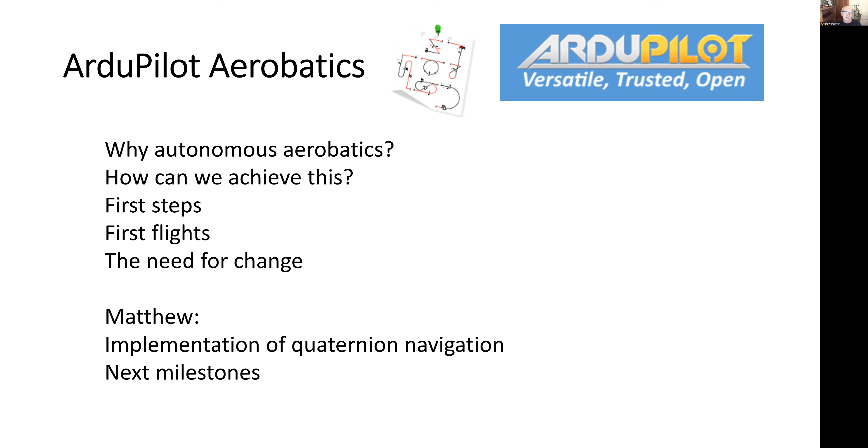So, autonomous aerobatics. In the full-size world, in 1913, a military pilot named Nesterov was the first in the world to perform a closed curve in a vertical plane - basically, he did a loop. With this maneuver, Nesterov really laid the foundation for modern aerobatics.

Of course, aerobatics in the model world means different things to different folks. There's precision aerobatics, which is a bit like figure skating; IMAC, which is a bit more like slalom skiing; and freestyle or 3D aerobatics, which is like snowboarding. To some pilots though, aerobatics is simply doing the occasional loop or roll.

Adding aerobatic possibilities to ArduPilot gives pilots using ArduPilot something really cool to show their mates, but there are also potential uses in collision avoidance, upset recovery, and other more serious applications.

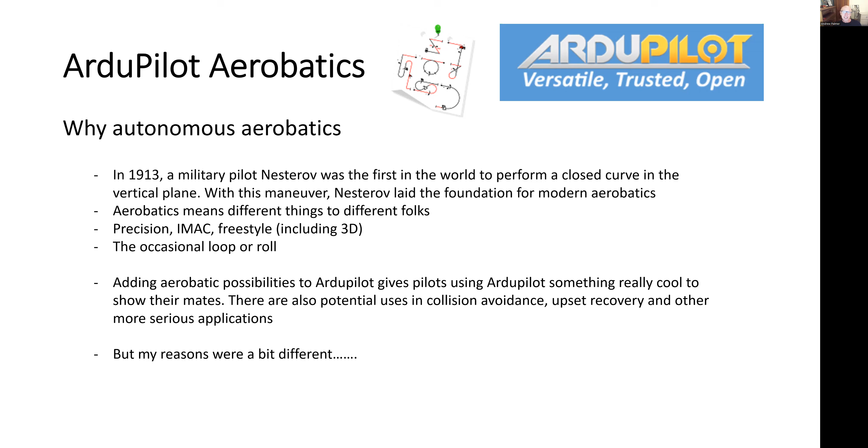But my interest in this was something a little bit different. A little background: I've been flying model aircraft aerobatics, and in fact full size, for a long time. I did some recent work as a rescue pilot for a company using an autonomous autopilot system, and that was really my first introduction to autonomous systems for model aircraft. I thought it would be quite fun to give ArduPilot a try myself.

Concurrently, a group I was involved with were developing a system for displaying competition aerobatic flights as a ribbon or trace on a computer screen, with eventual thoughts towards autonomous judging. I thought it would be really cool to have a model fly the competition maneuvers autonomously, so we could see what the perfect schedule should look like in real life - it's all very well seeing a model fly a ribbon on a computer screen, but you need to know what it should look like in real life. That was really my trigger point for the interest in autonomous flight.

This would be great not only for pilot training but also for judge training. I thought a good starting point would be: could I get a model to fly the outline of the aerobatic box? For precision aerobatics, the schedule's flown in a defined area of 3D space called the aerobatic box or aerobatic zone.

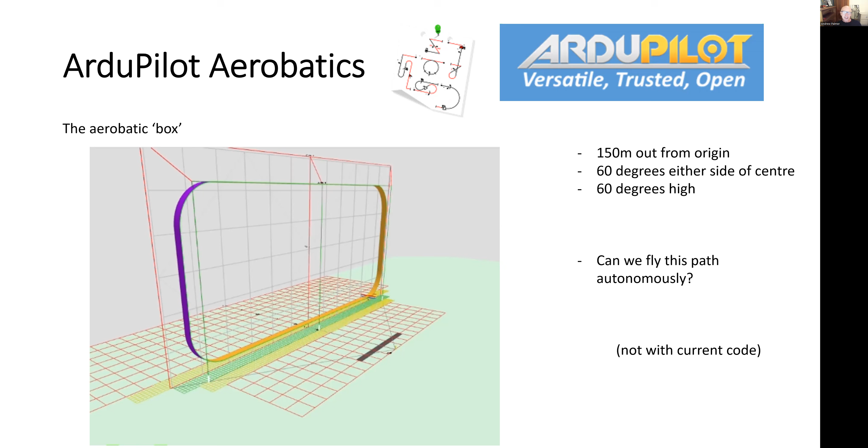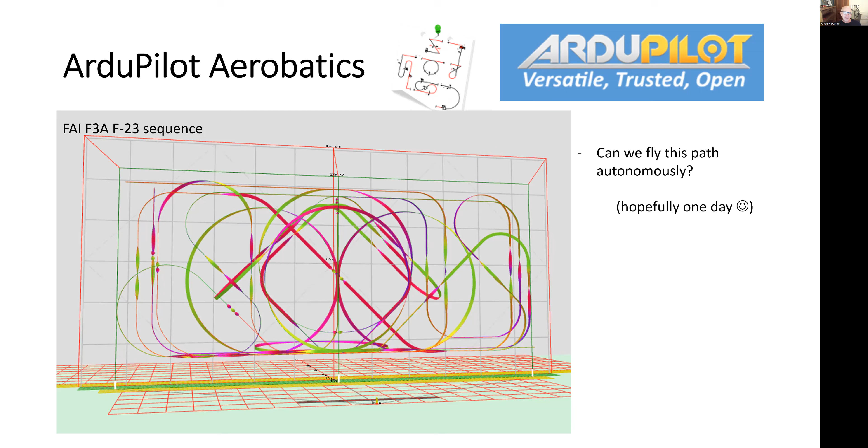So how was I going to achieve this? It was clear just from my early reading that ArduPilot in its current form would not really get me upside down. Now, my mother took my brother and I to night school classes in BASIC in the early 80s, but that's about it. I'm not a coder. I bumbled my way through an iOS and Android app, but nothing more. So really I was a bit lost and not quite sure where to go.

But in my Google searching, I stumbled across the ArduPilot commercial support page, and I saw Andrew Tridgell as a lead developer and thought, well, an email to him would be worthwhile, nothing lost. So a week or two went by and really I'd about given up all hope, but then a reply arrived. Andrew said, sounds like a great project. So it put a smile on my face and we were underway.

So I met up with Tridge on Discord and he very kindly spent a lot of time talking me through the ArduPilot code base, how things worked, and thought that using a Lua script to implement a mission item or a script item during a mission and returning back to the mission would be a good place to start.

So Tridge added a new mission script item, made the required changes to the C++ code, and very quickly we had a scripted loop where we could set the roll rate to 0, define a pitch rate, define a throttle percentage, and away we went. And we could do a roll in a similar manner. But early on, we discovered that we'd need a yaw rate controller, so that was also added to the C++ code. And now we could start writing some different maneuvers in Lua.

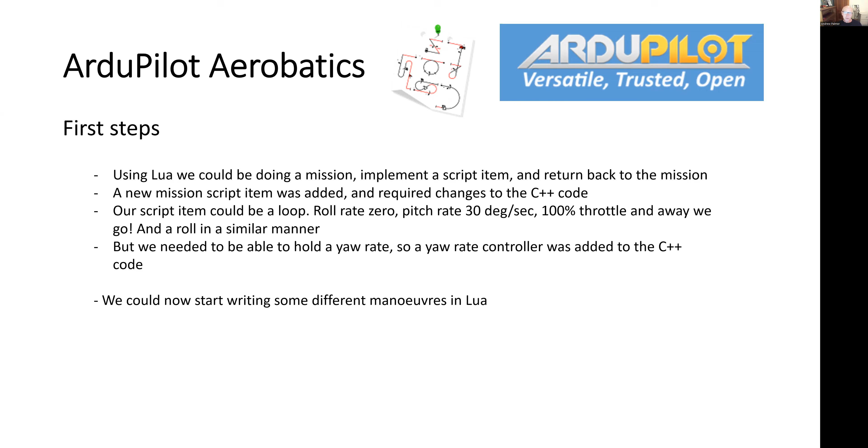So this was really exciting. For me to think that it was getting tantalizingly close at this point, and really it was. So we needed a way to pick a maneuver.

So within the code, we could add a scripted item, have a command for which maneuver we were going to perform, and we could pass some arguments along with that maneuver. Things like for a roll, you might want to pass the roll rate and how much throttle you want to use, or the roll rate and maybe how many rolls you wanted to do. So we started off down those lines.

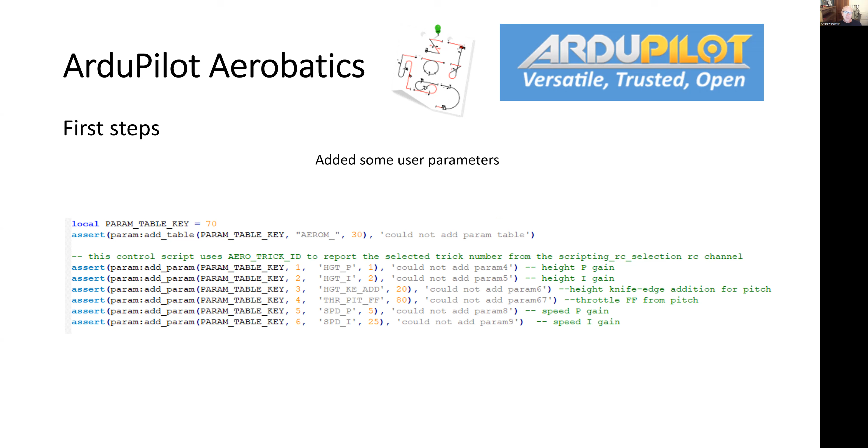We also discovered that we'd need some user parameters, and these were added over time, which gave a little bit more flexibility to performing these maneuvers. And of course, we needed to define the maneuver itself within the Lua script, and so that happened as well. This is just some sample code for performing an axial roll.

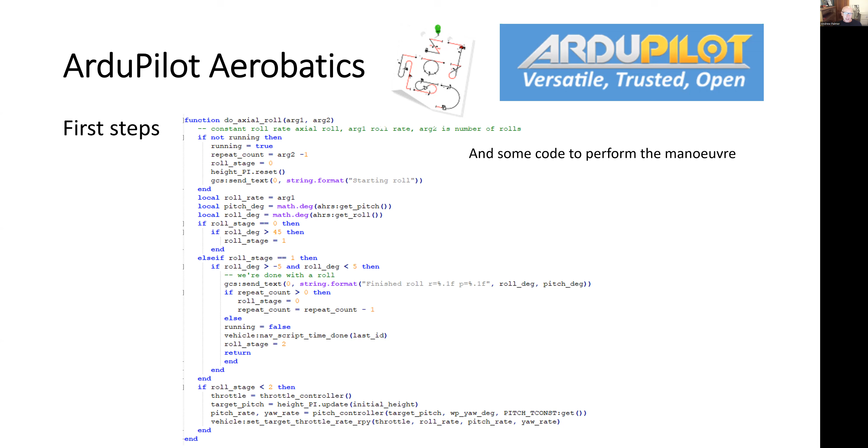Now, those were our sort of starting steps, baby steps really, and scripted aerobatics was born. Now, Henry Wurzburg has made some really exciting changes to that initial code. Not only has he done the documentation on the wiki page, but he's added tricks on a switch, which is just really, really cool, where you can define a switch on your radio transmitter and basically be flying along, flick a switch and do a roll or do a loop or whatever you define. And that's just a really cool development of this original idea.

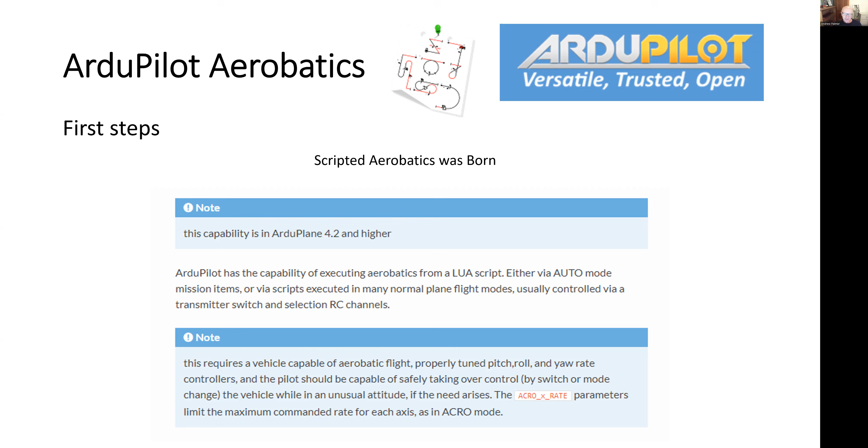And just to show how simple things are, this is an example. I'm sure you're all familiar with Mission Planner and planning a mission. So between a couple of waypoints, we can add a script time item or command. We can tell a command ID, which our Lua script interprets as whether it's going to be a loop or a roll or some other maneuver you've defined. We can pass a timeout, which is important if things go wrong - we want the mission to continue at some point rather than the script try to do something that it can't. And as I mentioned earlier, we can pass some arguments as well, things like roll rate or perhaps number of rolls. So that was all really exciting stuff.

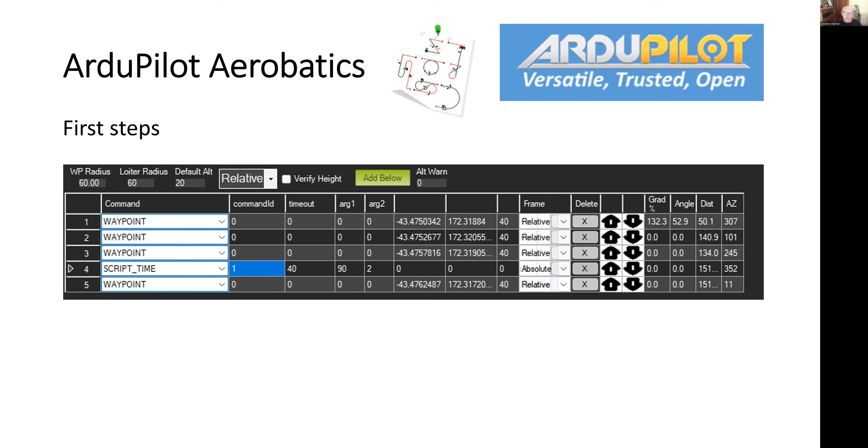One of the really powerful things with ArduPilot is testing missions using SITL, and we can do that with aerobatics as well. So this was an early flight on SITL, using RealFlight to display the aircraft's flight path. This is just a couple of minutes, I'll let this play. As I say, this is very early days—there's no navigation during the maneuvers, and that's something Matthew will talk about. So this is just a mission with some aerobatic script items between waypoints.

Once the Lua script's written, adding these aerobatic maneuvers between waypoints is really simple and easy. Anyone can do it, you need no programming skill at all. So this first maneuver was a Cuban 8—a 5/8 loop with a half roll on the way down, then a 3/4 loop, another half roll, and then exit.

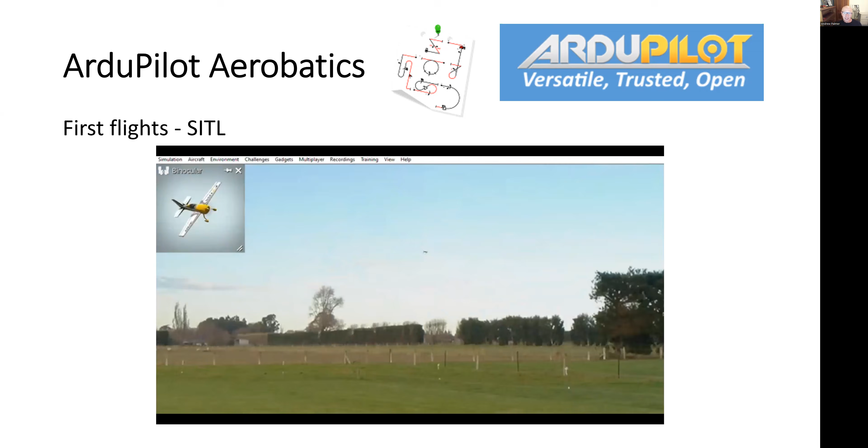You can see the big jerk there at the end of that maneuver. That's the aircraft heading to the next mission waypoint, because again, here there's no path tracking during the actual maneuver. So this is a half Cuban 8 to come back, a maneuver familiar to anyone flying any basic aerobatics. And here we go with a slow roll. It looks like there was maybe a bit of building avoidance there, but really it was just the roll ending and the aircraft heading to the next mission waypoint.

And that was just a loop. Right, so that was just really exciting stuff. And of course, after SITL, well, you've got to go and try it for real.

Now, as I mentioned, I've really had very little experience with ArduPilot, so I thought a good model to start with would be a foamy—something cheap, simple, something I can fly at home and do some flights on. So the model I picked is probably not ideal, but anyway, it's an indoor EPP model. It's 36-inch span, got 3D control throws, cheap small servos. It's pretty unstable, and the trim's always different and all over the place.

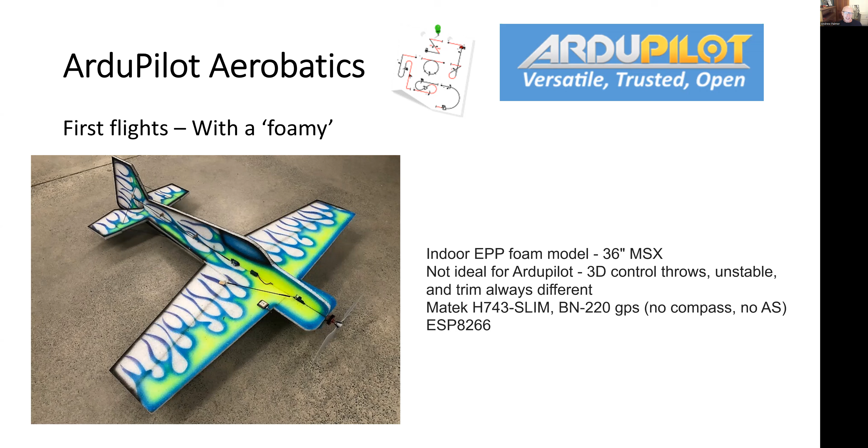But nevertheless, I put a Matek H743 into it, a BN220 GPS, which doesn't have a compass. I didn't put an airspeed sensor on the model. I did, though, put an ESP8266 to give some easy accessible telemetry so I could change things while I was flying and see what was going on. I found the 8266 worked well in this model because it's foamy, there's no RF blocking bits, and with this plane it was remarkable the range I got out of that back to my laptop. It's quite surprising.

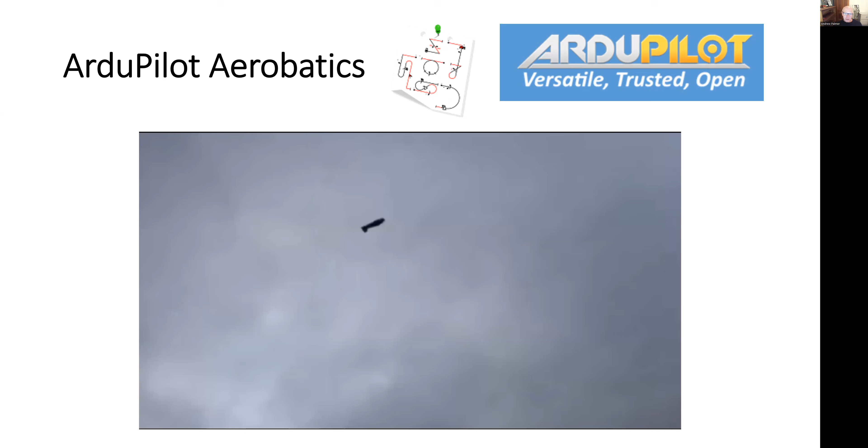Anyway, so with this model I went out and tried a roll. This is really one of the first rolls. I was reasonably high because I didn't really know what was going to happen. But through the mission, it came to the roll waypoint and did a roll, and I thought, wow, that was really cool. And a couple of weeks later, the roll became a rolling circle.

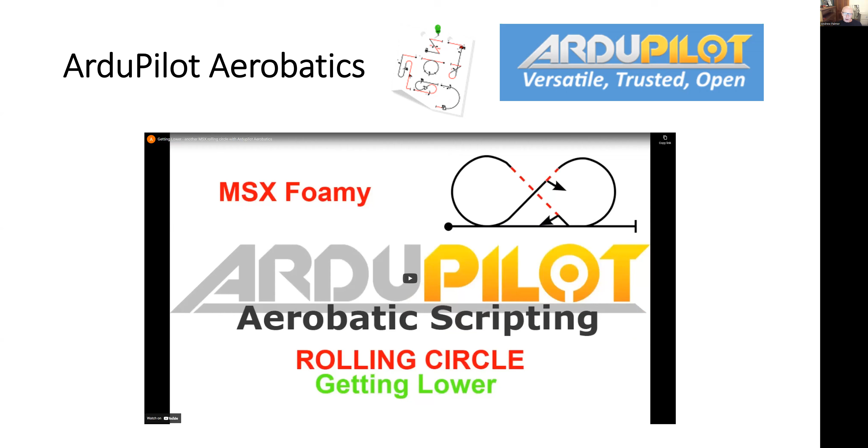It was so cool to see that the first time. It's just amazing to see a real rolling circle on an aircraft actually working. Look, it blew me away. In fact, my wife was videoing it, and she couldn't quite believe it—that it just went along and did the whole thing itself, including the recovery at the end. Of course, that was early days, so rather than one roll for the whole circle, it was one and a bit rolls. But once it got back to the starting point, it sorted itself out, got upright, and headed off to the next mission waypoint. So, very cool stuff.

But we always knew this wasn't going to be the final solution. It was a really good start and really generated a lot of interest, but there was no navigation during maneuvers. One of the big things about any sort of aerobatics is things must be wind corrected, and of course there's no wind correction going on. It was a bit like a blind pilot receiving aerobatic instruction over a radio link with lots of static—it was probably going to get there and maybe the loop was going to happen, but we didn't quite know where it was going to finish.

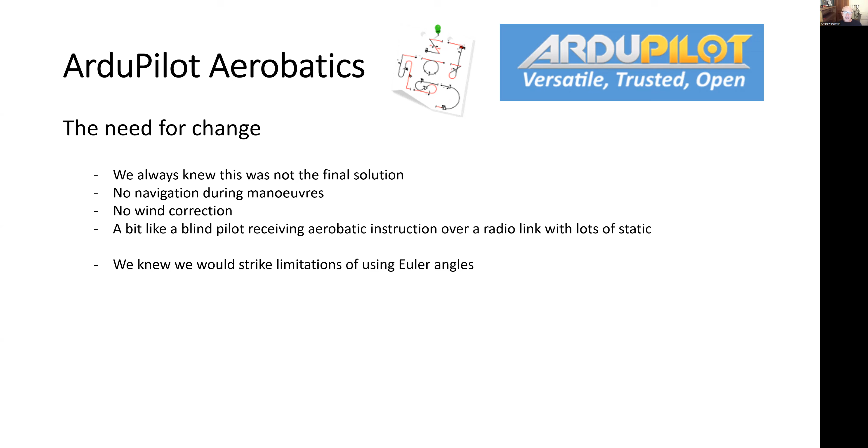And we knew we were going to strike limitations with Euler angles. So, still had a lot to do—we still do have a lot to do. We're thinking about developing and adding quaternion navigation, and we also need a method for defining maneuvers.

So Matthew Hampsey is going to continue. Matthew's a software engineer at a company called Seeing Machines, and he's a PhD student at ANU. He doesn't have any fixed wing experience, but he's got a lot of experience with drones. So he's been a huge help, and Matthew's now going to continue with some more technical bits and pieces.

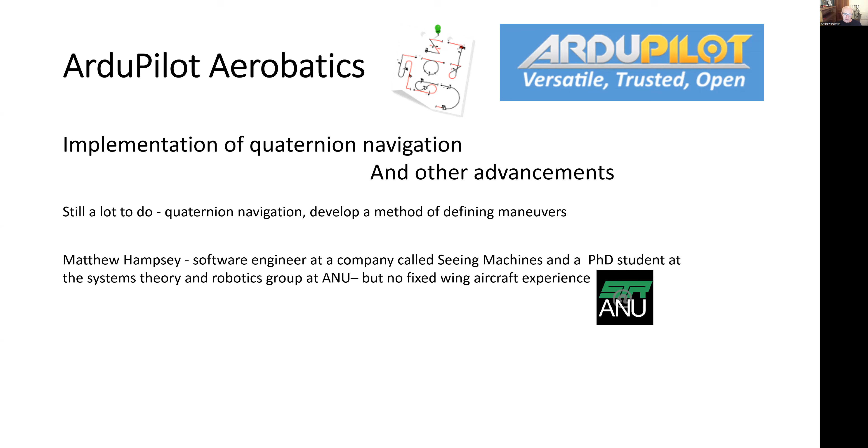Great. Thanks for that, Eddie. Hi, everyone. I'm currently dialing in from a tiny hotel room in Paris, so I might have some connectivity issues, and I do apologize if that happens. I'll also leave my video off, just not to incite the wrath of the internet gods, as the connection's not great.

So I'm just going to be going over a couple of the technical details about the next stages and how we ended up implementing this stuff in the Lua scripting front end. I'll emphasize again, I'm a software engineer, not a fixed wing pilot, so there's a very good chance that I have some misconceptions about fixed wing flying. If anyone sees those, please feel free to let me know.

Cool. So just an overview of what I'll be going through. I'll look at how we want to define arbitrary trajectories for the fixed wing to follow, how we do the control on these trajectories, some of the issues we encountered when doing this path following due to our local attitude parameterization, and then how we fix some of these issues with a global attitude parameterization.

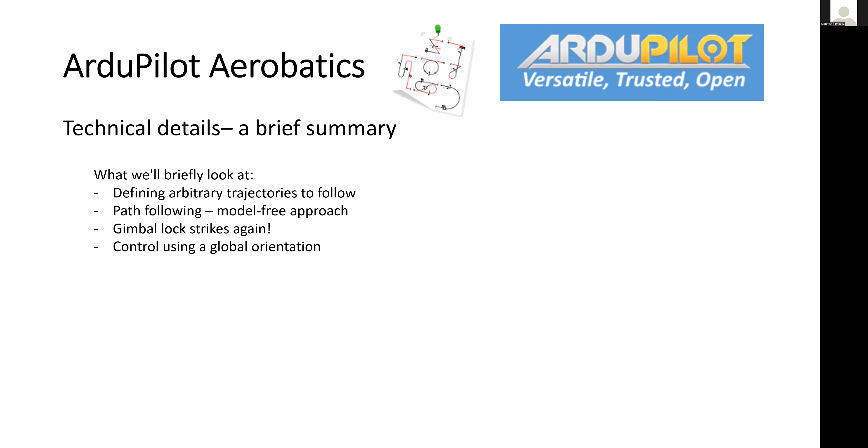Cool. So for the initial maneuvers that Andy and Tridge did, and you guys just saw some cool videos of that, most of these maneuvers were circular. And so it's possible to fly these trajectories by fixing a constant angular rate in one of the Euler angle parameters. And the value of that rate is determined by the radius of your circle. For example, if you're flying in a circle in the XY plane at some fixed height, you can fix a yaw rate of 360 degrees divided by the time over which that circle needs to be flown. And that will actually fly you in a circle.

So that's what I mean by the terminology hard coding here, although that's probably not the correct phrase to use. A more correct phrase is that the rate is fixed for a particular maneuver. This approach does obviously not scale to arbitrary trajectories because the relationship I just mentioned is specific for circular arcs. So it's possible you can try and define all of your trajectories as piecewise circular arcs, but then you need to also insert a bunch of glue logic in between those, and it starts getting pretty difficult.

So what would be much more flexible is if you can abstract out the trajectory into a function that maps you from time into some system state. And in fact, in dynamical systems, that's usually how you define a trajectory. Now, it is not immediately clear that this problem is actually any easier than the previous problem of defining your piecewise circular arcs. Because if you want to define the trajectory at each point in time, you now have to specify at a minimum a position, a velocity, an attitude, and angular rates, and all of those states and inputs have to satisfy your dynamical constraints of the system.

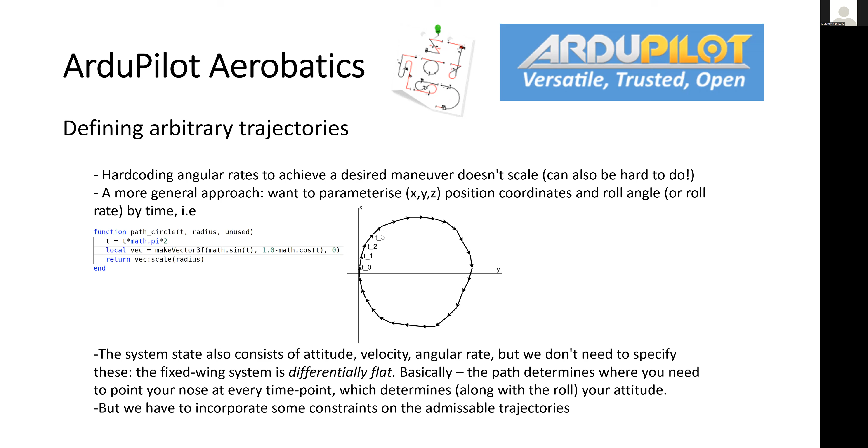Thank you. So these paths give us a position over time, and they allow us to infer a velocity, a set of Euler angles, and angle rate inputs from this. But of course, as with any real system, you end up straying from this defined path due to a variety of disturbances that get introduced. So we have to introduce stabilization along these paths. And we do this by introducing a Euclidean error in both the position and the attitude. And then we just use this error to feedback on the angle rate inputs. And we just use proportional feedback for that.

So in fact, in practice, we actually end up relying on this feedback quite heavily, because everything that we've done so far has been model free, just because it's hard work coming up with a model. And so the parametric uncertainty that we're working with ends up being quite large. And so the feedback actually drives a lot of the path following. So in practice, this works in level flight, but flying aerobatics in a XY plane is not particularly exciting. So we also have to start looking at flying vertical trajectories.

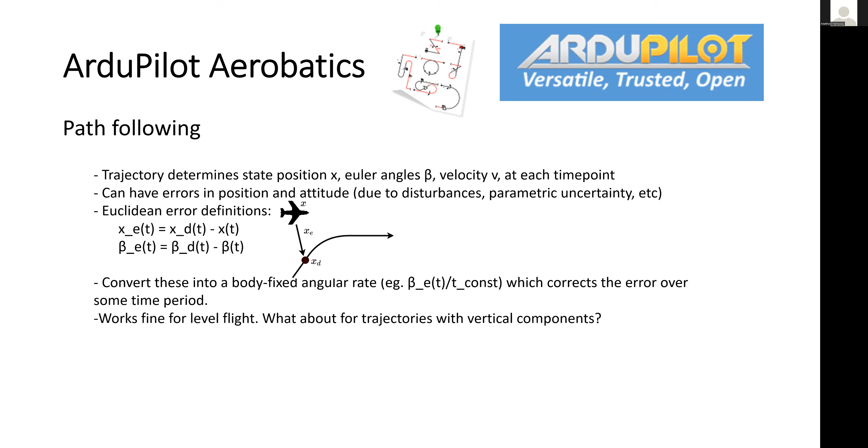So if you go to the next slide, please.

Okay, and so we need to fly vertically, and as we might expect, things start going wrong here, as anyone who has worked with Euler angles will tell you. So we define our vertical circle easily enough by just rotating the chunk of code we saw previously that defines the circle. And we threw that into the Lua script and tried to fly that, and it just didn't work. And so we dig into the code a little bit, and in hindsight, the problem is obvious.

So ArduPilot uses a XYZ convention for Euler angles. And when we point directly along the Z-axis, we lose a degree of freedom. And basically what happens is roll and yaw become the same thing. And you can see that in these diagrams. And there's also a little video here, if we play that.

So how does Euler work? This Gimbal machine shows us. Each part is linked to one another. So when the parts slide around, we can see how the rotations are passed on. By spinning each of the machine's 3 arms, we can rotate the jet into any angle. But notice when the jet points up, 2 of the circular arms match up. This is exactly the same effect of gimbal lock, causing 2 circular arms to rotate on the same plane.

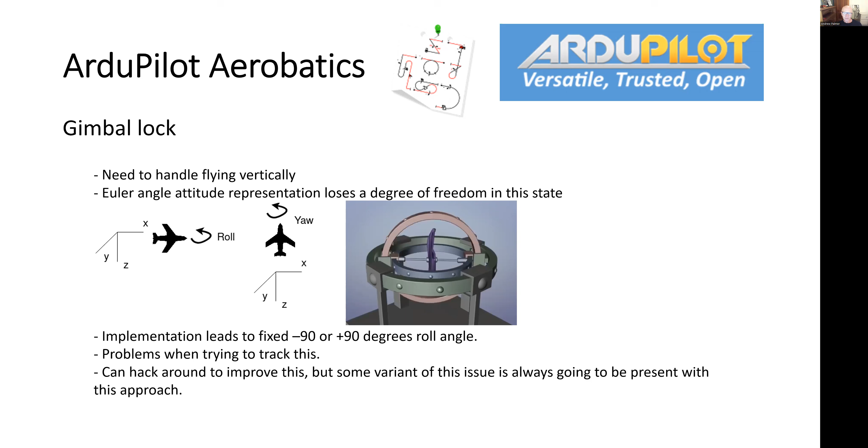Cool. And I just realized I forgot to credit that video. So my apologies for that.

So ArduPilot in the back end maintains a global attitude representation. And so when we want to go from that global attitude to our local Euler angles, and we're pointing straight along the Z-axis, you have to pick a convention for how you want to split the angle between the roll and the yaw components. And there's no right choice here. And in the implementation, ArduPilot will basically switch between a -90 and a +90 degree roll angle, depending on the extent of rotation around the Z-axis.

And so in effect, this introduces a discontinuity into the roll that we want to track, which just plays havoc when you want to track this. We really want our error trajectories to be smooth. So there's a number of ways we can try and get around this. We can kind of try and patch it by implementing some logic to detect when we're pitching up and altering how we convert to the roll angle. But at the end of the day, this is not a robust solution. And this is really a fundamental mathematical limitation of using local coordinates, which are Euler angles here, to capture a global nonlinear phenomenon, which is attitude.

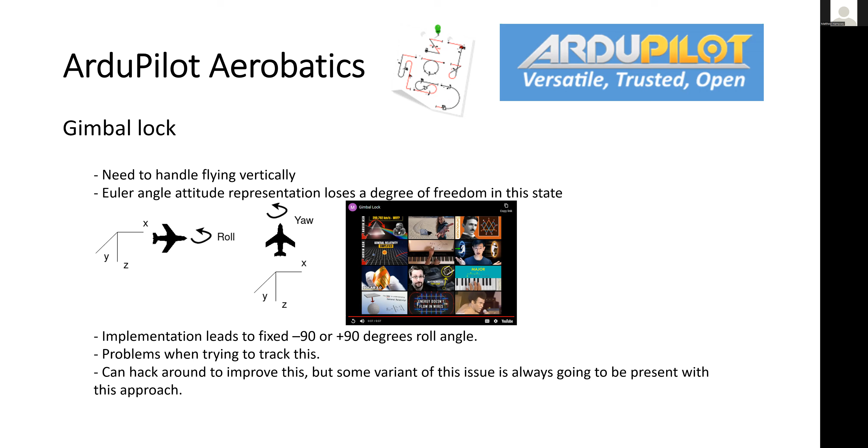So the previous error we used, the Euclidean error, where we just subtract the current state from the desired state, no longer works, because if we subtract two rotation matrices, that's no longer a rotation matrix. And so what people will sometimes do in practice here is they will subtract the terms and then they'll project the resultant error back onto the group. So in this case, we could subtract two matrices and then re-orthogonalize the columns of the matrix and renormalize them to get a rotation element.

But there is no reason that this actually works, because you can significantly change the point at which you project down to. So that error is not really physically meaningful. But we can obtain a physically meaningful error by using group multiplication. So in this particular case, the error term that we want is the rotation that takes you from your current attitude to your desired attitude.

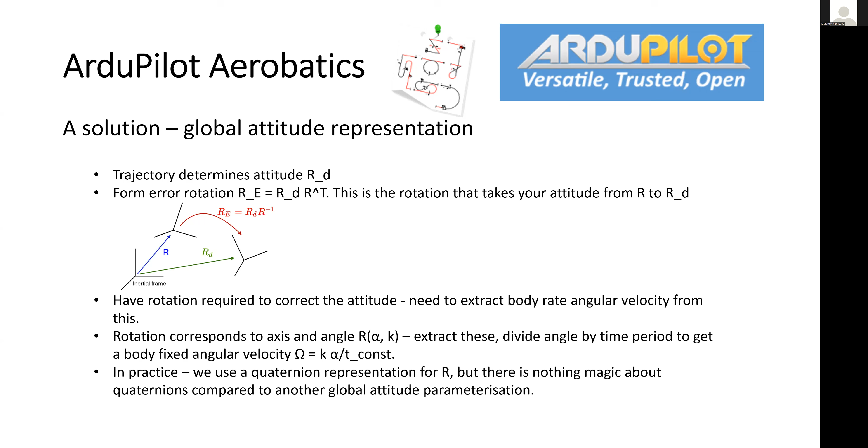Yeah, so unfortunately, I don't have a video to show you with this updated work in action, as it's still in early development, but that should be coming along shortly. And so for the next steps, we want to finish the current implementation and get it working robustly enough to put it on some real aircraft again, getting them to fly. For future work, we want the scripting interface to be robust and friendly enough for developers to start defining their own trajectories to be flown. And eventually we want pilots to be able to define their own 3D trajectories to be flown in some kind of CAD software, so that this stuff can still be used even if people aren't comfortable scripting.

And for other future work, this is really in the far future. So we're doing a bunch of cool stuff with symmetries of dynamical systems over at the Systems Theory and Robotics Lab at ANU, which historically have been used for observer design, but we're also starting to look at control systems now. So we're super keen to start introducing that stuff into ArduPilot and getting you guys some cool stuff to use. That's it for me.

Thanks. Fantastic. Thank you, Matthew, and thank you, Andy. So it's been such a privilege working with you two on this project. It's been absolutely brilliant, and I really enjoyed our sessions on Discord that we've been working on this together.

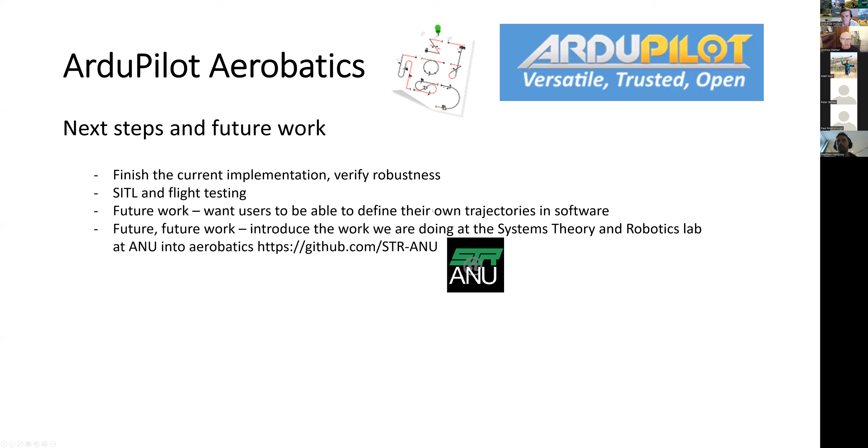Aresti, okay. So Aresti was a Spanish aerobatic pilot that sort of developed the Aresti method of notation. You can imagine in a full-size aerobatic plane where you've got a complicated sequence that you probably really can't quite remember, and you're flying along and the plane's vibrating, and if you've got a maneuver name written down, you probably can't read it. But if you've got a picture of a maneuver, you can probably make out what that's supposed to be. So that was the idea behind it. And you can convey a lot of information in very quick shorthand.

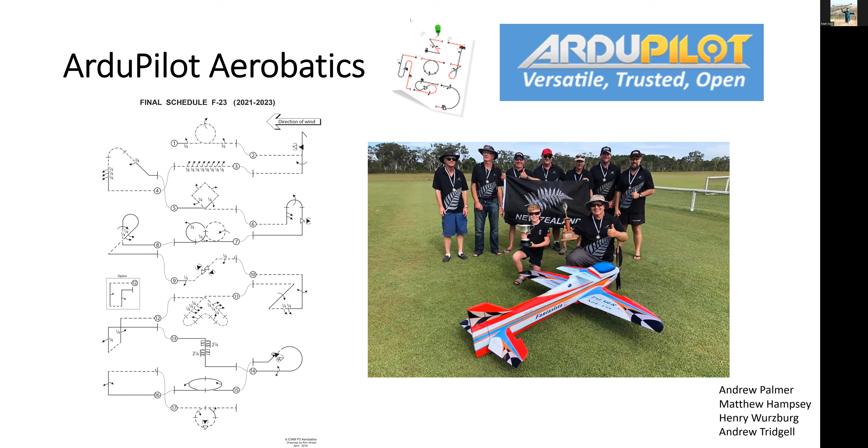And each of those notations would then have to have a few parameters. So you could, I don't know, double click on it and then it pulls up a box. And for the loop, you could define what your max load factor on your aircraft wants to be. And that would scale how big your loop is in your box on the right. And so you get this sort of direct feedback of where that thing would be, what position in space. So it would be a format that would be very intuitive to people likely to use this, with that instant feedback of what shape that would draw in the sky as well.

Yeah, in fact, the Aresti catalog is available to, well, I don't know if it's available to download. I was just going to have a look. Certainly available to purchase, which has got literally hundreds of maneuver components. And in fact, there's an online version where you can do exactly that as a full-size pilot. Drag and drop various maneuver components or maneuvers and build up a sequence.

Well, that sounds like a very hopeful way of doing this for aerobatics. I've noticed there's a Wikipedia page about this, the Aresti catalog, listing all the different notations and things. Interesting.

Right, okay, so we just got to get the maths right to get it to actually follow these trajectories. Hopefully Matthew, Andy and myself will do a bit more work on this after the conference. We'll probably initially do the sequences as functions in Lua, which is what we're doing at the moment. But there's no reason why that function can't then be broken out to be something fed in from these Aresti sequences, or a KML, or whatever. We might even support multiple inputs, as long as it can produce that path and define what the roll rate is at each point of the path. Yeah, then you've basically got the maneuver.